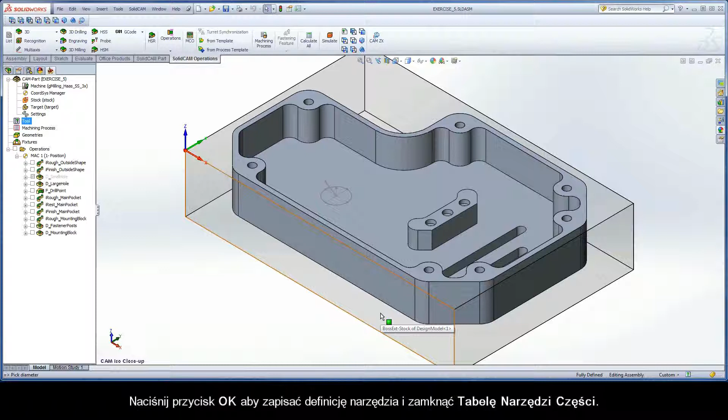Next, define the rough and finish machining for the counterbores on top of the mounting block. An iRough and iFinish operation must be defined. Add a new iMachining operation.

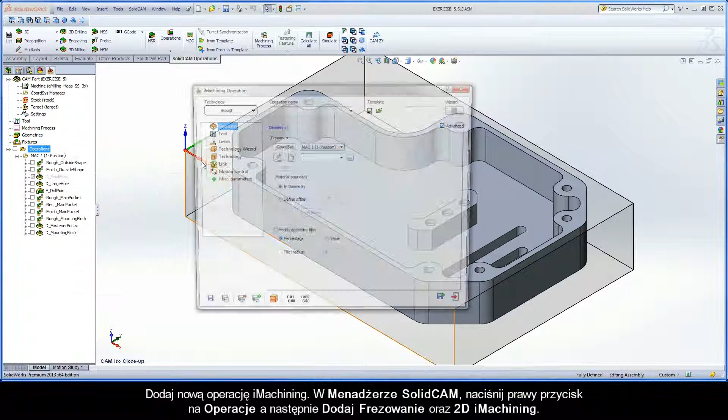In the SolidCAM Manager, right-click Operations, Add Milling Operation, and select 2D iMachining. The iMachining operation dialog box is displayed, and the default iRough is used for technology.

On the Geometry page, click the New button to define the machining geometry for the counterbores. For this operation, the geometry is defined as 3 closed pockets. In the SolidWorks graphics area, pick on the top edges of the 3 counterbore contours as shown.

When the confirmation messages OK to accept are displayed, click Yes to accept the chain selections. The geometry is defined. Click OK to confirm the geometry selection.

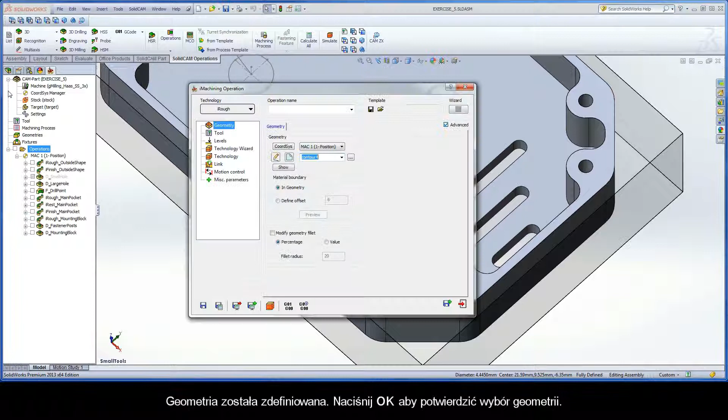Switch to the Tool page and click the Select button. In the Part Tool table, select Tool number 6, the 1.5mm end mill. Click the Select button to choose the tool for the operation and exit the Part Tool table.

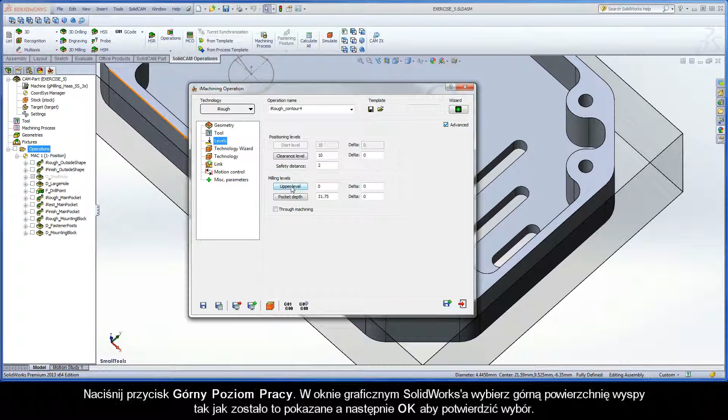Switch to the Levels page to define the milling levels. Click the Upper Level button. In the SolidWorks graphics area, select the top face of the mounting block as shown, and then click OK to

confirm the selection. Next, click the Pocket Depth button and select the lower face of a counterbore hole to define the machining depth. Click OK to confirm the selection.

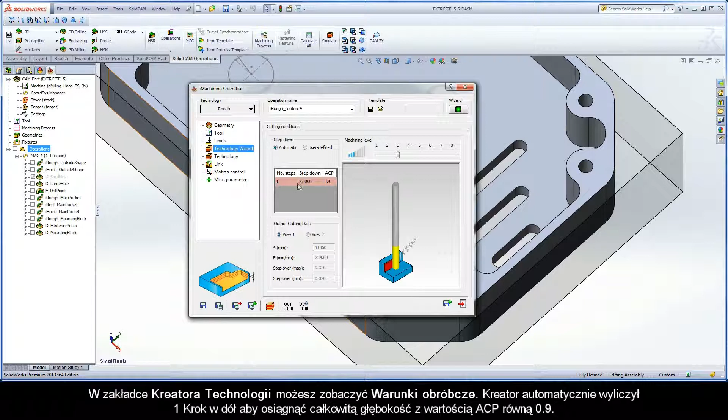On the Technology Wizard page, you can view the cutting conditions. The wizard automatically calculated one step down to achieve the total depth with an ACP value of 0.9. Because the step-down row is painted red, further reduce the machining level aggressiveness to 1.

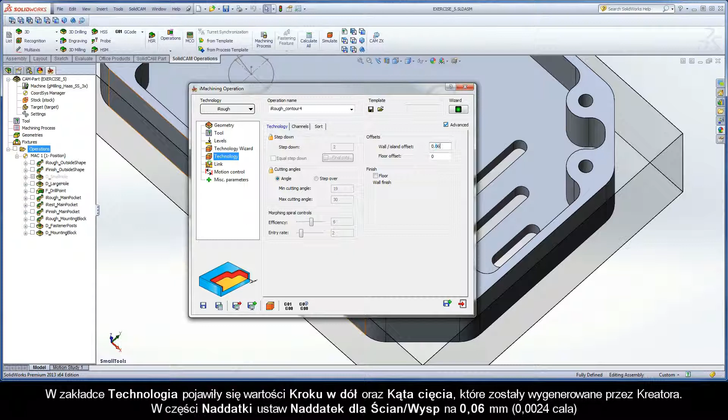On the Technology page, the step-down and cutting angles generated by the wizard are shown. In the Offsets area, set the wall island offset to 0.06 mm. Switch to the Link page and move to the Pre-Drilling tab.

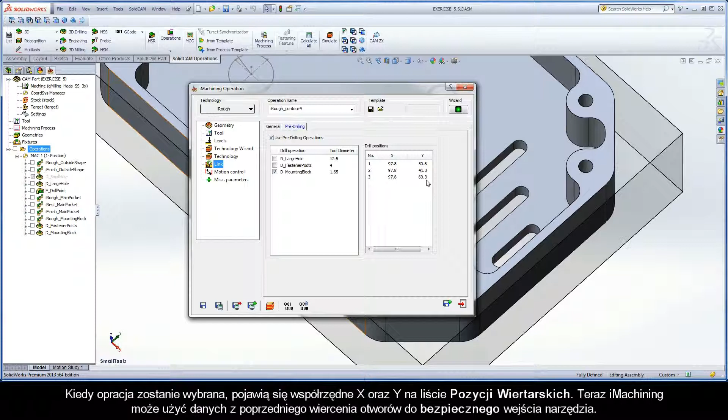Enable the Use Pre-Drilling Operations checkbox, and then select the last drill operation in the list, D mounting block with a 1.65mm diameter. When selected, the X and Y coordinates appear in the drill positions list. Now, iMachining can use the data from the previously drilled holes for safe tool entry.

Name the operation iRough counterbores. Click Save and Calculate, and then click Simulate. Click the Play button to view the iMachining toolpath at work. As you can see, the tool feeds down into each of the previously drilled holes and performs the pocket roughing toolpaths.

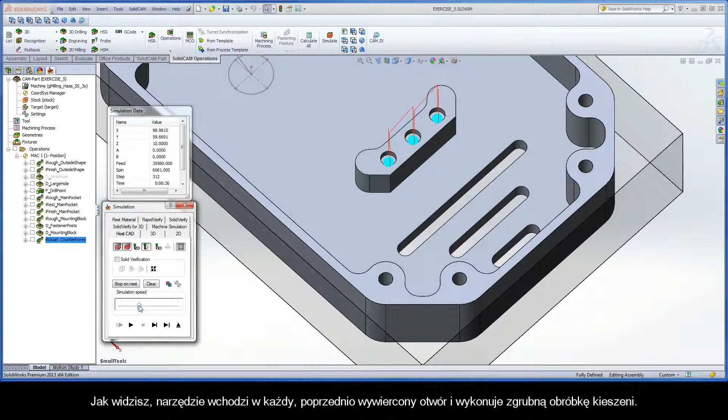Close the Simulation Control Panel with the Exit button to display the iMachining operation dialog box. Now, define the finish machining for the counterbores. Create a copy of the current iMachining operation by clicking the Save and Copy button. The current iMachining operation dialog box closes, and the copied operation automatically opens.

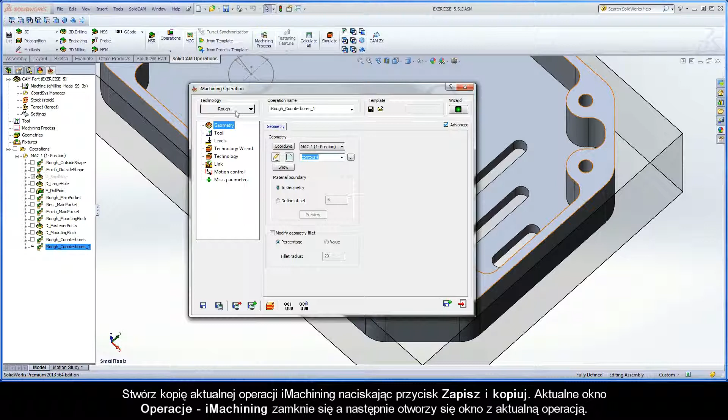Click the drop-down menu under Technology and change the operation type to iFinish. The copied machining geometry, 1.5mm tool, and milling levels from the previous iRough operation are used for this iFinish operation.

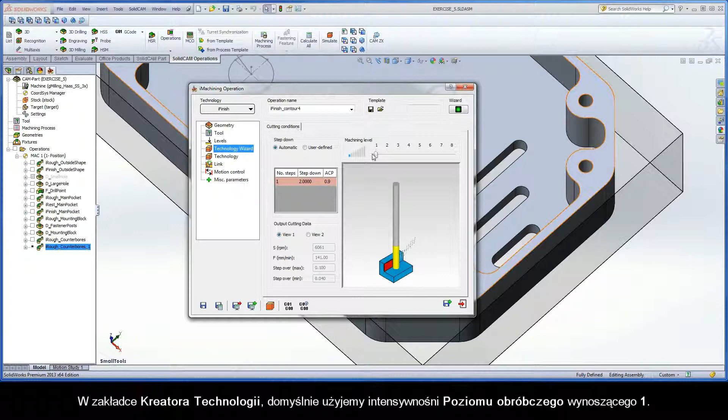On the Technology Wizard page, the default cutting conditions are used with a machining level aggressiveness of 1. On the Technology page, the step-down and cutting angles generated by the wizard are shown. By default, the wall island offset is now set to 0.

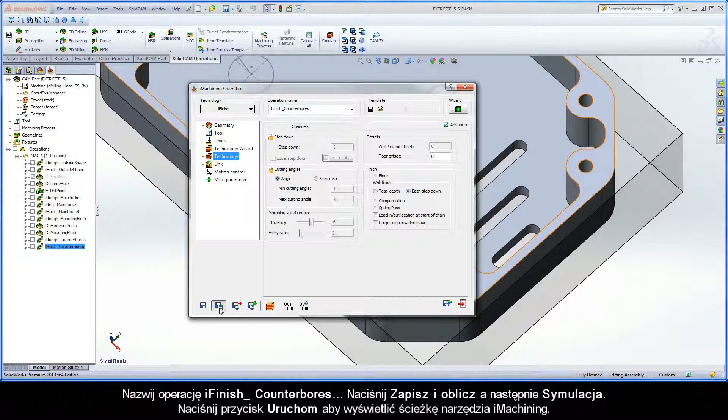At this point, the operation can be calculated, and the iMachining toolpath can be viewed on the model. Name the operation iFinish counterbores. Click Save and Calculate, and then click Simulate. Click the Play button to view the iMachining toolpath at work.

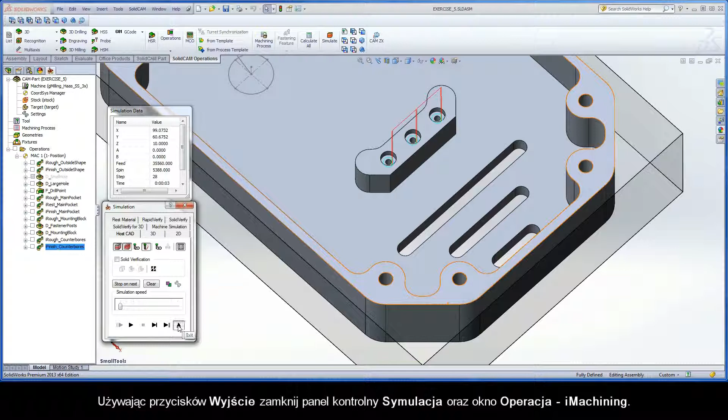The tool feeds down into each of the counterbores and finishes the walls by removing the 0.06mm offset. Using the Exit buttons, close the Simulation Control Panel and the iMachining operation dialog box.